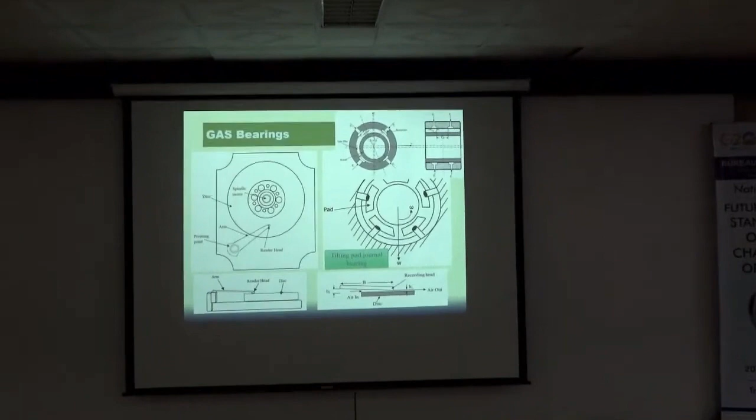Now how do we control air bearing? Same thing, the way we use magnetic bearing bias current, we use here the aerostatic. We pump the compressed gas, compressed air through different vents. Now I can design those kinds of vents - a compensatory, it can be a different kind of thing. It can be venturi, it can be capillary. I have so many designs for that, exactly to match the results. Right, so these technologies are there.

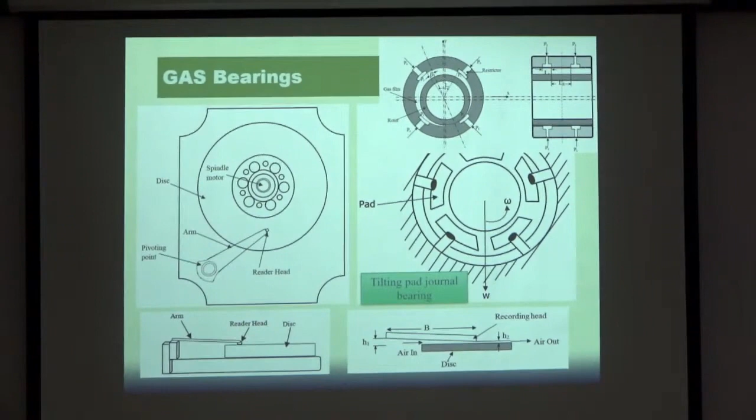So magnetic bearing as such is not there. We are trying to utilize existing technologies, trying to implement in magnetic bearing so that the solutions are better and better. So somebody says it is completely mechatronics. No, mechatronics is providing some tools to us, but our innovation, the way we think, the way we act, the way we actuate, they are traditional or old one also. It's not that kind of much difference as such coming.

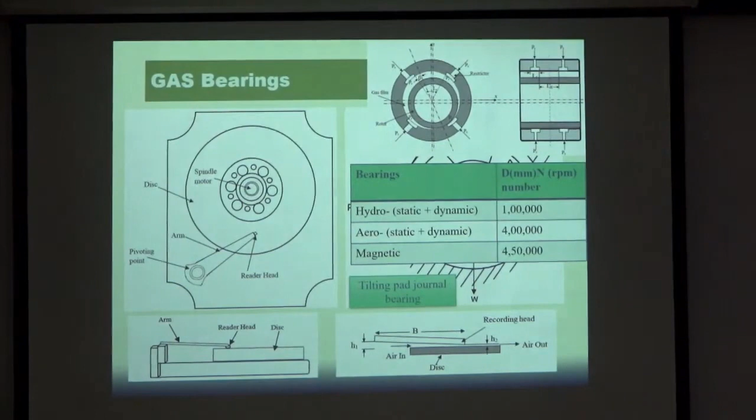Now if I compare the DN number - in hydrodynamic and hydrostatic, DN number goes to 100,000, while coming to aerodynamic or aerostatic, it goes around 400,000, and in magnetic it's 450,000 - sorry, 450,000 the DN number as such. So it's not really varying significantly from air bearing.

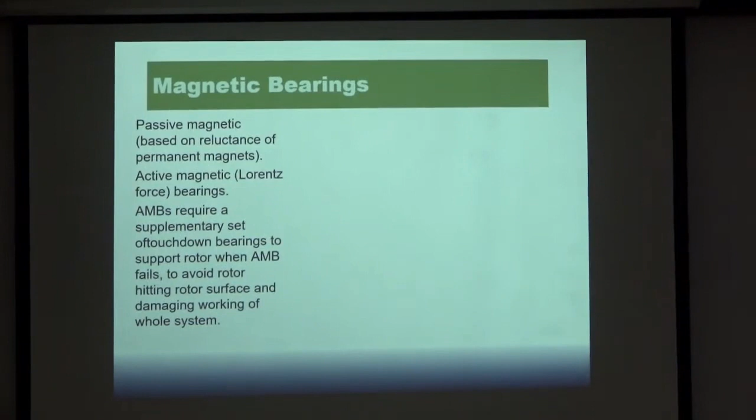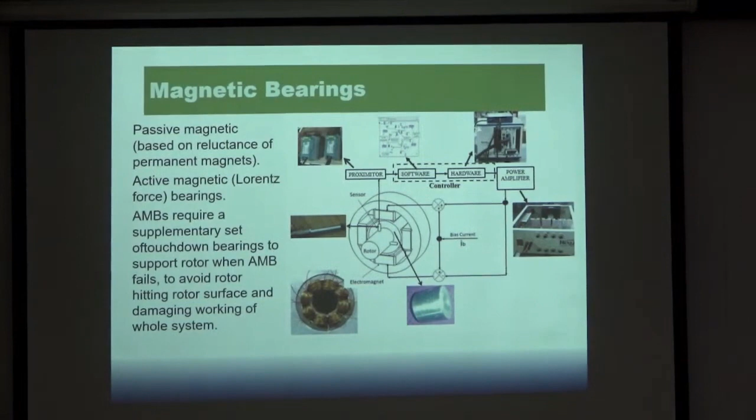Now that's why, come to the magnetic bearing. Already Professor Tiwari has mentioned the passive magnetic bearing, active magnetic bearing. Active magnetic bearing, he has demonstrated a couple of applications already. So I'm not going to that. Only my experience with active magnetic bearing.

We did a research in 2006. We made an active magnetic bearing. We compared the initial cost as well as the running cost, and we found something like it costs around $1,500, if I compare with the conventional bearing, that costs only $15. That's almost 100 times less. Even the running cost - whatever current we are providing to levitate the shaft, that came around 48 watts, while we found the loss in conventional bearing was only 7 watts. So we found that we really required some alternative, otherwise it cannot penetrate in the market.

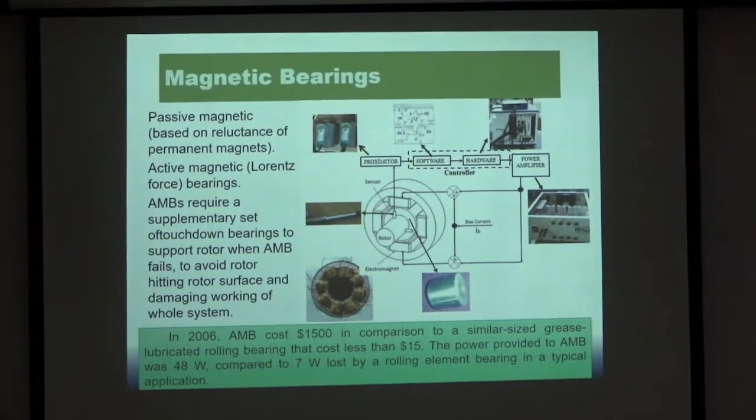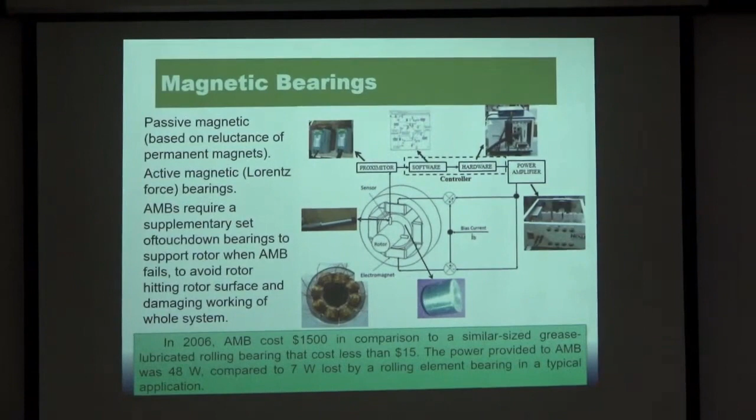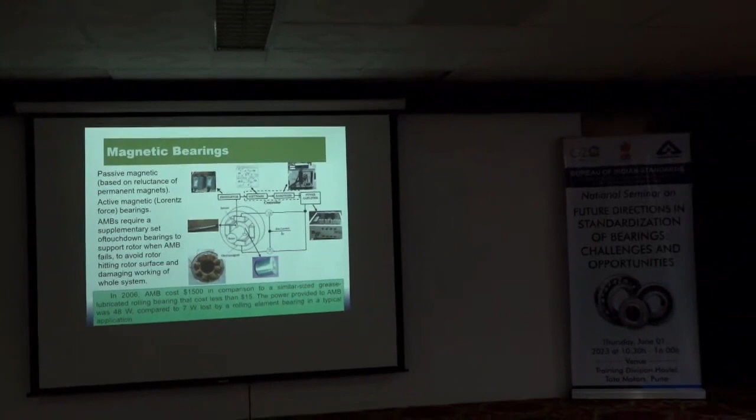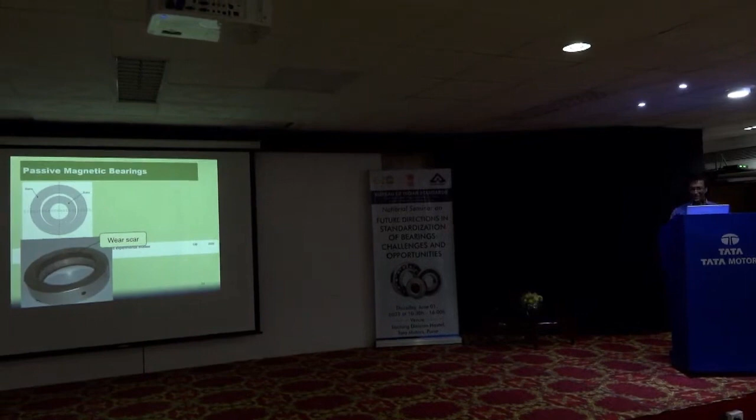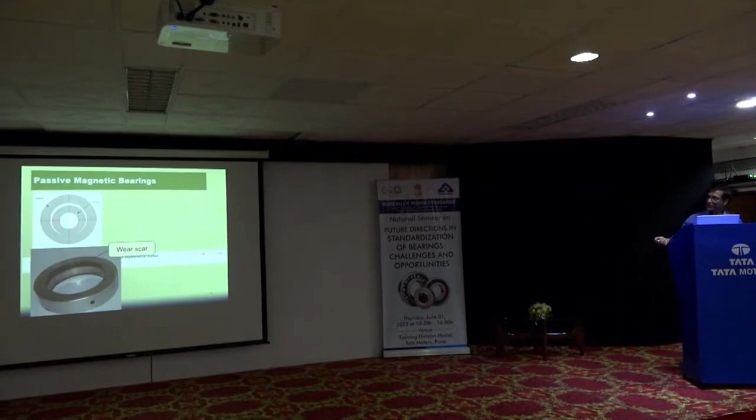So that's why I'm going to present a few slides on that. Now, minutes now, okay, I'll just try to wrap up. So magnetic bearing, there are some sort of hidden facts. We assume that it will repel, and then we tried - this is a shaft inside the bearing, and there should be levitation as such, and then because of the repulsion force, it should work.

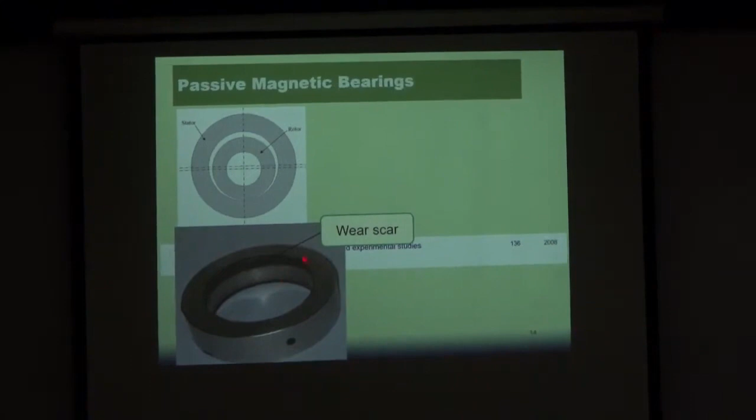However, it works in both. One is repulsion, the other in axial direction it becomes attraction, and attraction creates more problems. So whatever bearing wear which we don't obtain and are not able to see in a conventional bearing, much more wear occurs in the permanent magnetic bearing. So that was something wrong.

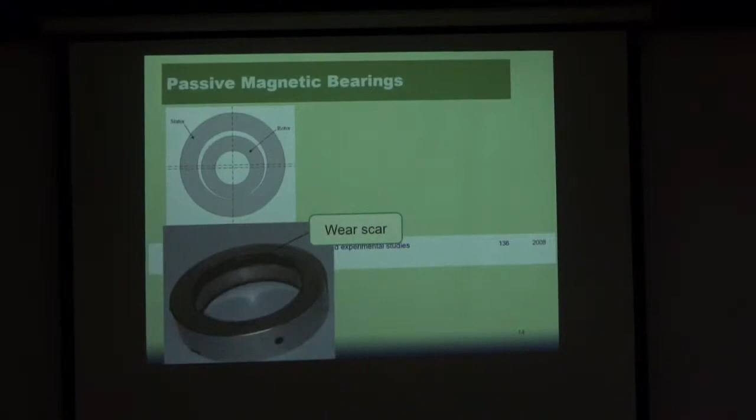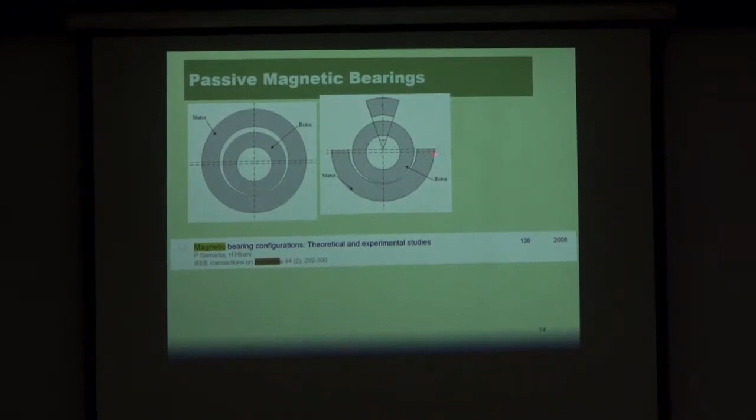We need to change it, so that's why we changed it. At the bottom we require levitation, from top we don't require that kind of levitation. So we recommended this kind of 180 degree and 45 degree arc, and we made the bearing. We published a paper also in IEEE.

However, later we found that even a little bit of change, a little disturbance is disturbing the bearing again. And then we found that this kind of rotor, or maybe say the sleeve - the way Professor Tiwari has mentioned, we required a sleeve to be mounted on the shaft, and this 45 degree arc - we found it really gets damaged. The shaft goes and hammers the magnet, and the magnet being brittle, it comes in a fragment, and because of that the complete polarity changes.

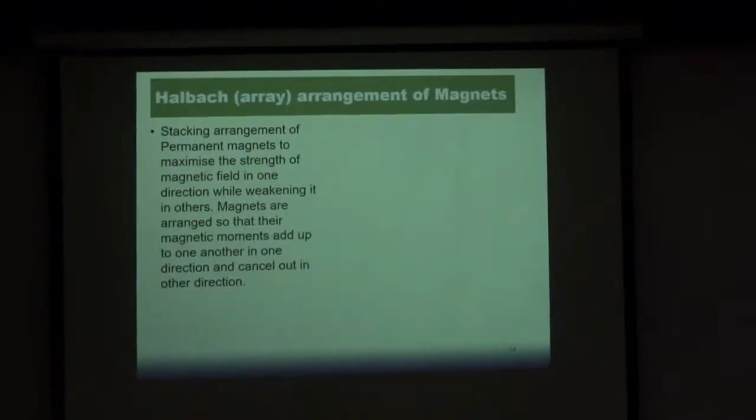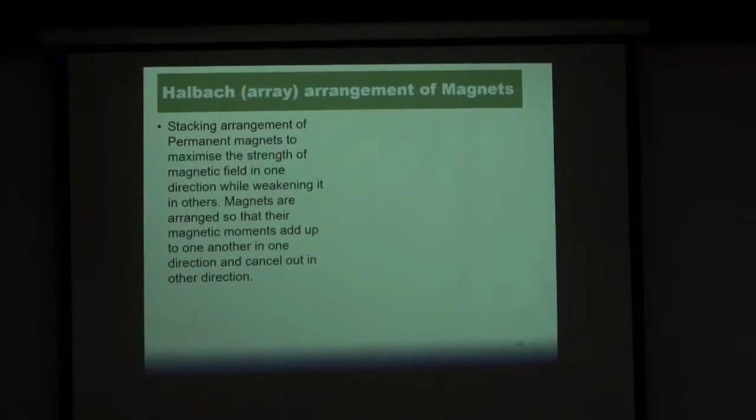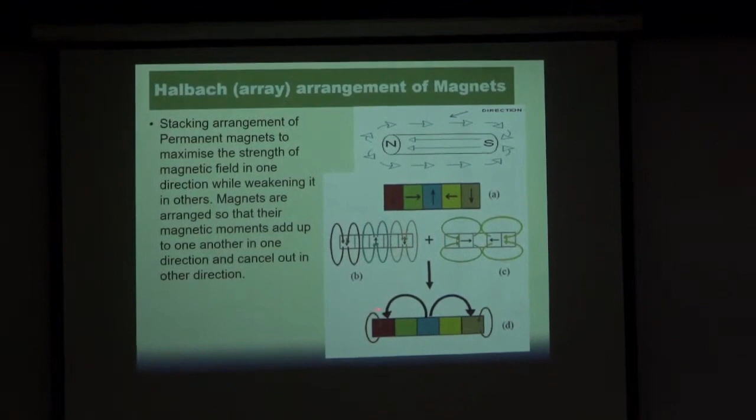It doesn't remain uniform, so you start one crack, that's more than sufficient to break the complete bearing. So that's why we required some other thing compared to what we were making, and that's why we started with the Halbach array arrangement. That's again in published literature. It's basically stacking up small magnets, and in that we get maximum radial force and minimum axial force. That's what we have done, and this is available in literature. The kind of polarization direction has been shown. We stack the magnet in a manner so that overall we get more and more radial, minimum axial arrangement. And I'm just trying to give an analogy - same thing we do in rolling bearings also.

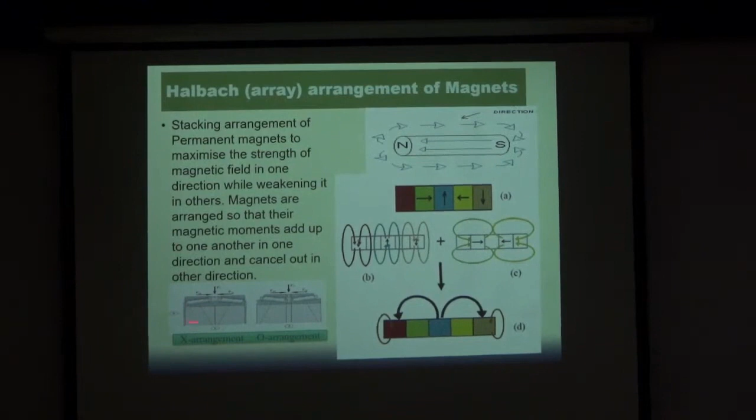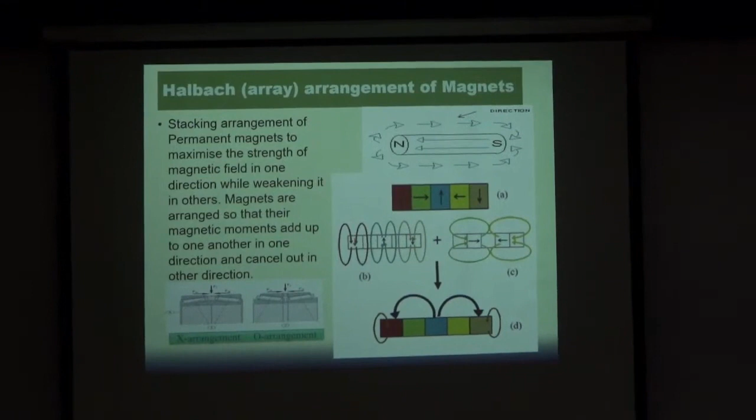If you look at the taper arrangement, we go back to back. It can be an X arrangement or an O arrangement, whichever manner you want. But we do a compensation in this manner - that's the same thing we are doing in a Halbach array.

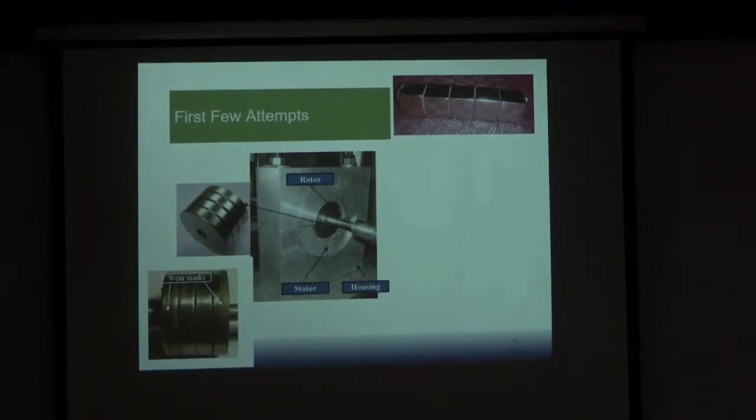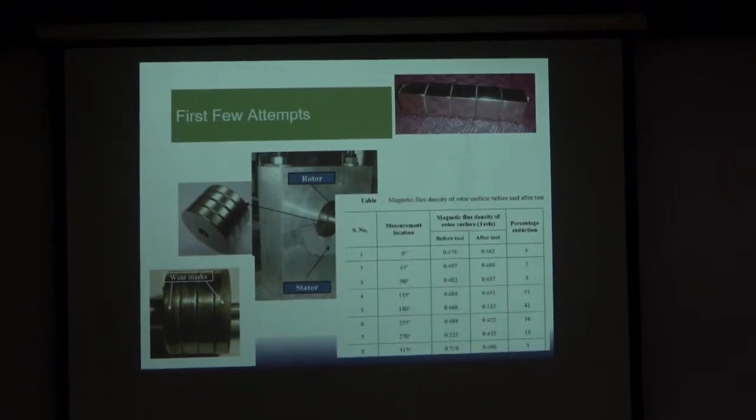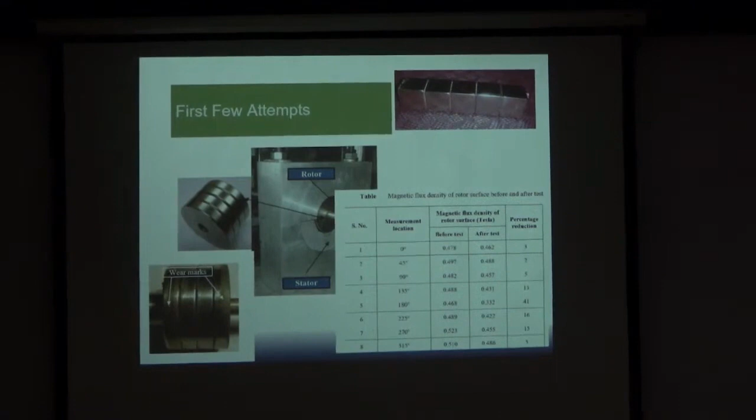Then we made those kind of Halbach arrangements. We thought we were going to get very good results, but unfortunately we did not get that kind of results. We again got wear of the magnets, because some more thing was still required, and that's what we implemented. We also observed demagnetization happening very quickly - the magnetic field, after a few rotations or maybe a few hundred rotations, demagnetization happens very spontaneously, and that creates more problems.

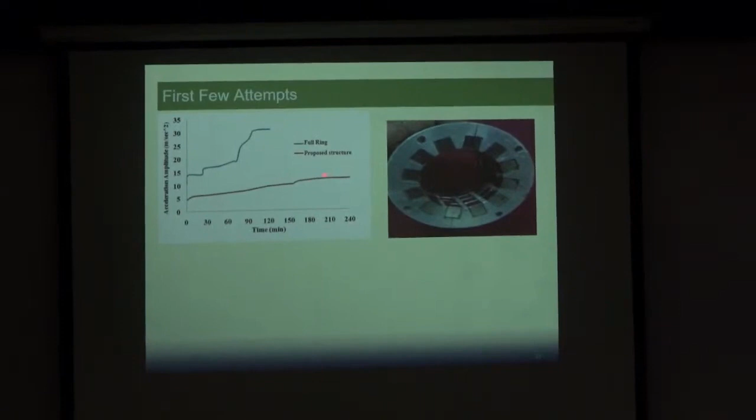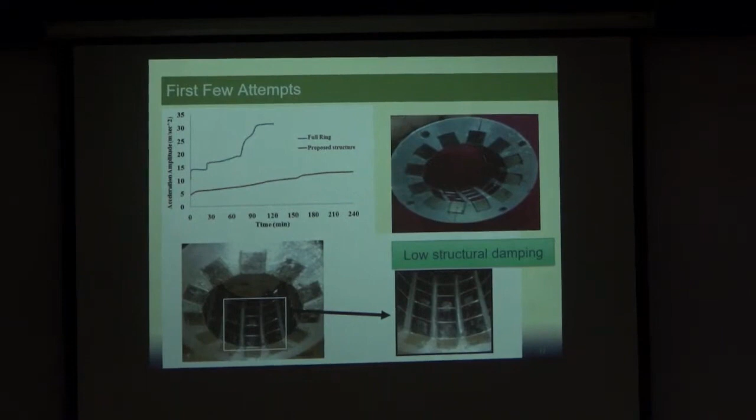In fact, it was much lesser compared to the earlier full ring. We are able to see the disturbance is not that high now compared to the full ring, but still the damage happens, and then we need to change the magnet also. Initially the complete wear out was everywhere, while in this case wear is happening at some places only.

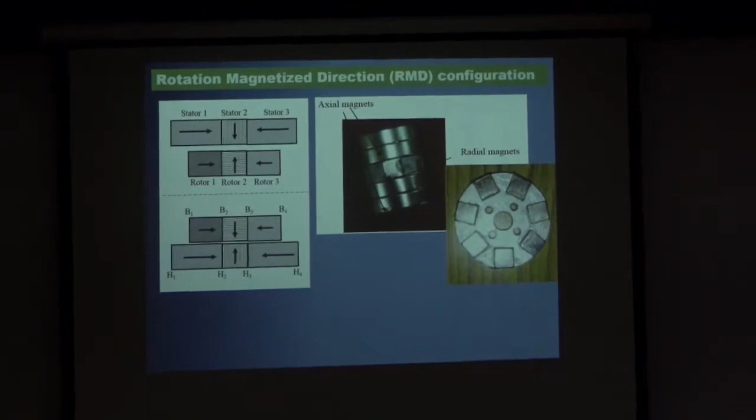So that's why we started with a rotational magnetized direction arrangement. Halbach has a number of arrangements, so we started working with RMD structure. It gave very good results, but of course it gives more manufacturing difficulties to us. Now we need to make a magnet which is also radial magnetized, and we don't get these magnets so easily - we need to buy it. That's why I'm requesting industry to participate, so this kind of research can go in a much different manner.

We had a restriction of a 10mm shaft, and our theoretical calculations show that 10 micron will be the best option. Making a permanent magnet at 10 micron, 100 micron is difficult for us immediately, but when industry funding comes and they start working, I think a solution will be there.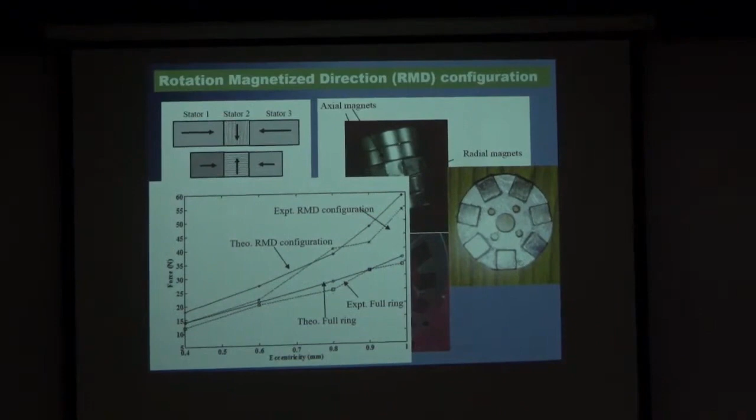This is what I'm just trying to show in the results - RMD gives very good results compared to the other structures, and that's possible. If we try to do this kind of research, it will really help.

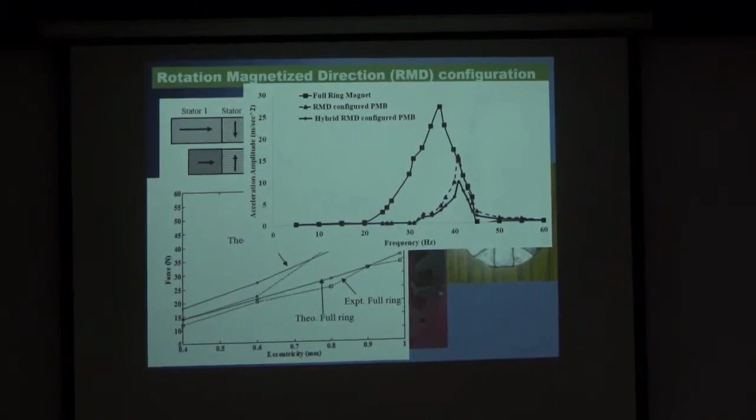We also did a hybridization with a hydrodynamic bearing, so instead of the wide span of natural frequencies, or the frequency domain, now we get a much narrower domain. In this narrow domain, we should not operate the bearing, or the shaft should not be operated in this frequency domain. In other domains it's possible, because we are not getting that kind of disturbance.

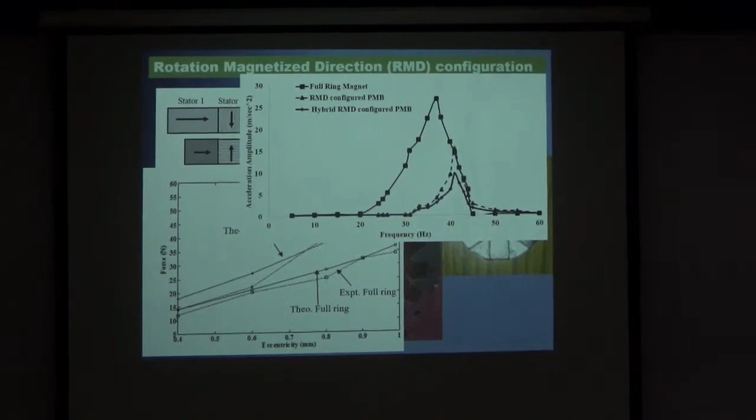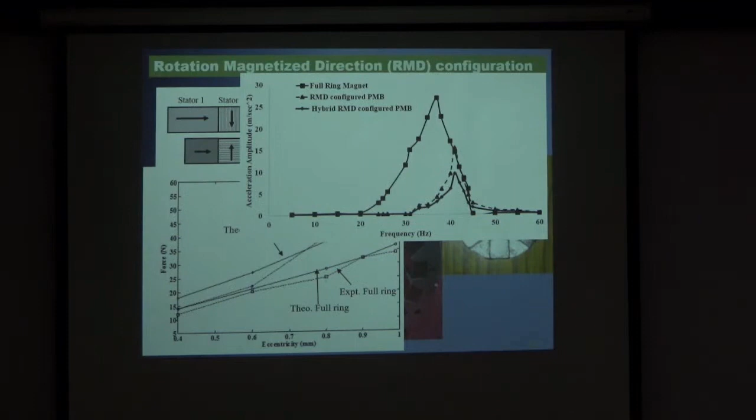Whatever I showed works only for one particular direction, maybe a specific load and speed condition. Whenever you change it, you disturb it, and then things will not work. When you require a reliable product, you need to keep disturbing it again and again so that you get the best product in this case.

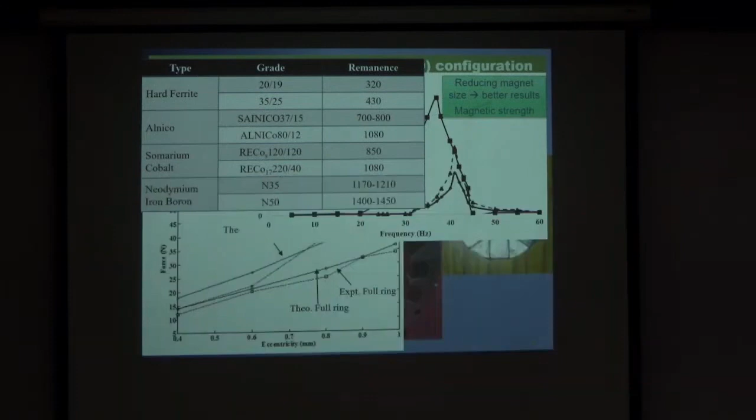So this is what we have done. And now, as I say, we really require thinner magnets that will give good results. We worked with N35 magnet. We also have N50 magnet which we can procure and get good results.

Finally, we did a testing on this. We kept a very big flywheel. We could store energy, and we could run it for a number of hours. So this is working, but again, if you do a little more disturbance, it will fail. But this is the future for us - at least from a storage device perspective, this is foolproof.

And if industry starts participating, I think almost all the bearings can be replaced with this kind of bearing. So this is my understanding.

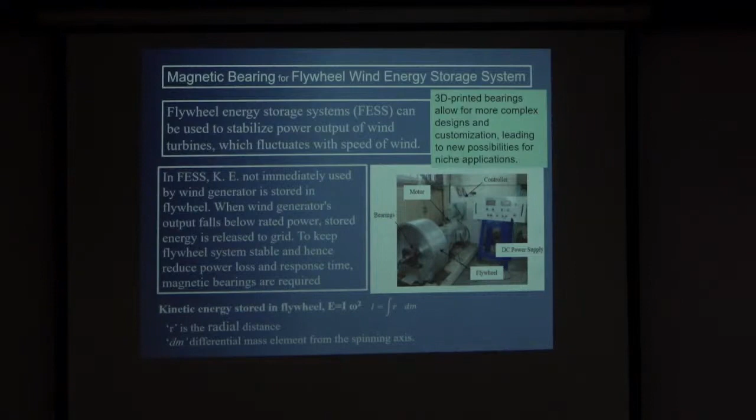Now I was thinking about how to make a 10 micron, 100 micron magnet. 3D printers are available, printed circuits can be done. I can combine AMB and PMB together in a segmented manner - what we call a segmented manner. That is possible with 3D printing. But how much it will really give results needs to be tested. So hypothetically it is possible and it will provide good results.

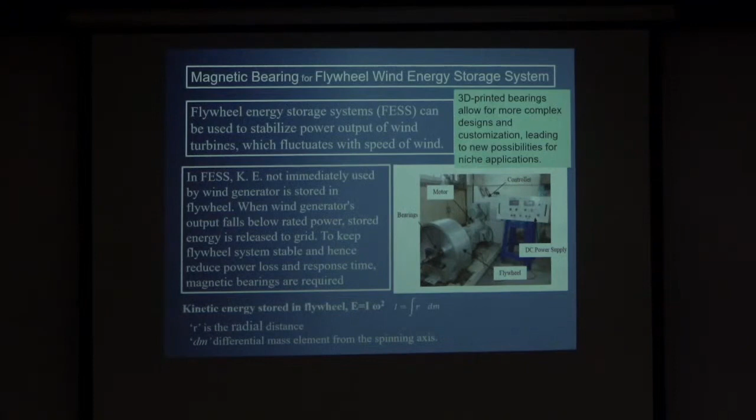Anyway, I'm just trying to show the last 2 slides. Many things which initially people thought were not possible, I'm showing those are possible.

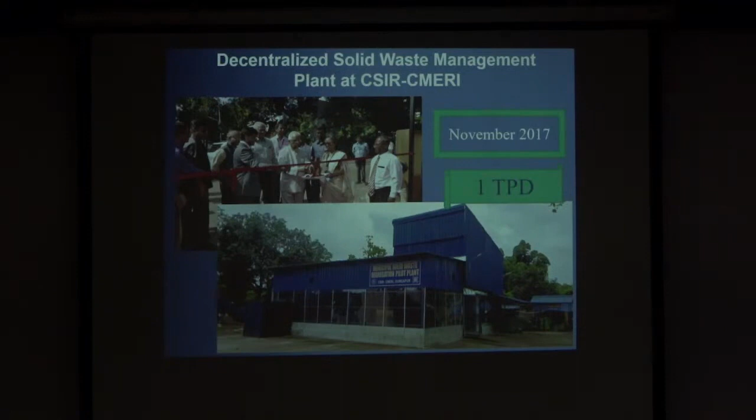Waste management I did in 2017 in the colony, like at CMERI, and it's still working - we don't dump anything outside. I have been informed that CSIR has now given almost 25 crores so that it should spread to all CSIR labs, so at least they should remain green labs. So I'm thankful that whatever I started in 2017, now after 6 years some results are coming.

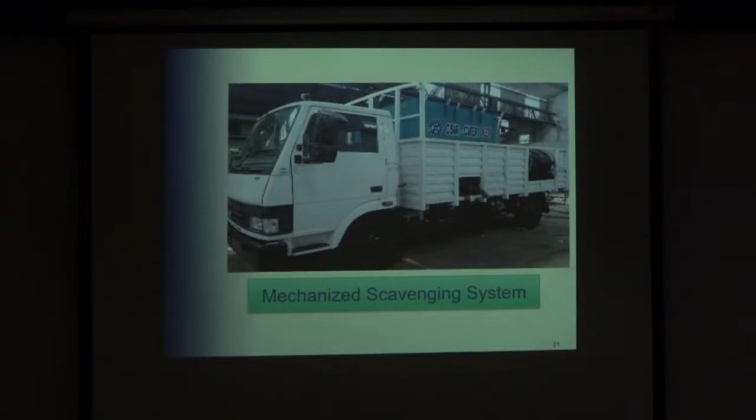Now this mechanized scavenging system - again people thought about it in one way. We have been informed that our cabinet minister is also mentioning that CSIR has made a mechanized scavenging system, because I have seen in my colony that most of the buildings have garbage and waste remaining, water remaining there.

And finally, when we had mob control related problems in Kashmir, we made 3 vehicles. When I was taking this project, everybody felt that we cannot manufacture, we cannot develop, but this is what is possible. So everything that is appearing today as not possible will be possible with a consistent effort. Thank you for your attention.